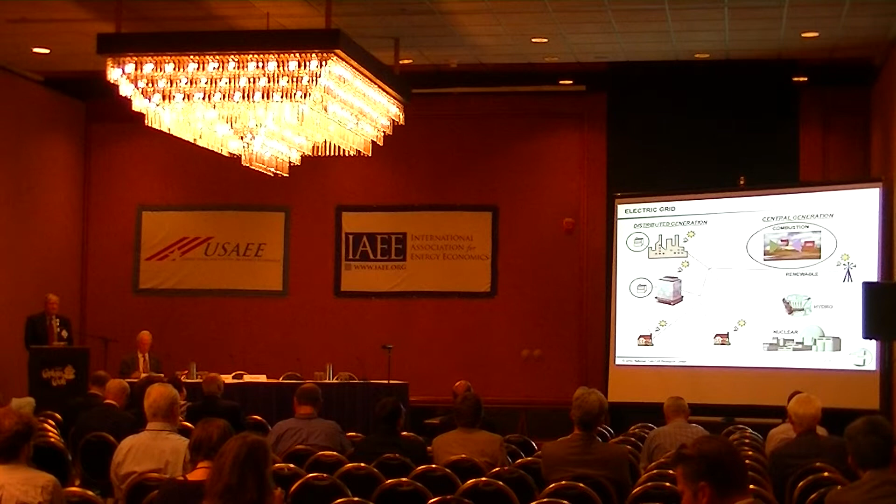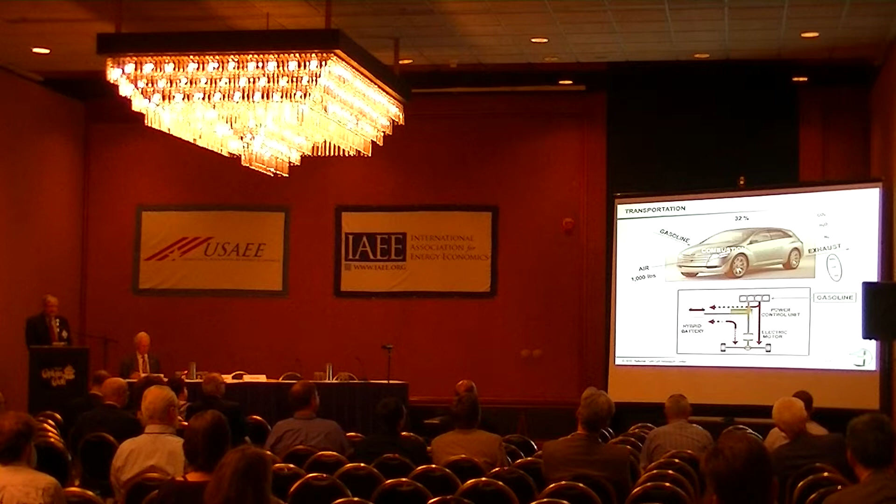Combustion today is responsible for upwards to 80% of total power generation in the world, whether electricity generation or the propulsion of the automobile. It takes fuel and air, processes it through steps that include combustion chemistry, and then mechanical devices such as pistons, turbines, and generators to eventually produce electricity for our electrical needs, like room lights or this new hybrid automobile technology. You can almost intuitively feel there's limited efficiency due to the mechanical systems, and we know that due to the combustion chemistry we have emission of pollutant species, the list we just went through.

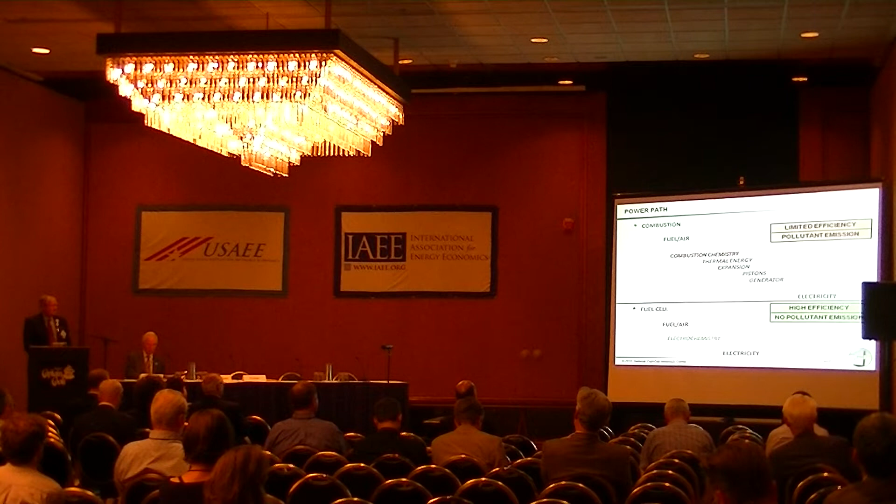As an alternative is the fuel cell, whose attributes include one step from fuel and air to electricity, electrochemistry. This gives rise, intuitively, to a high fuel-to-electrical conversion efficiency, no pollutant emissions since we don't have combustion chemistry but instead electrochemistry, and it's also acoustically benign, which is attractive for many applications.

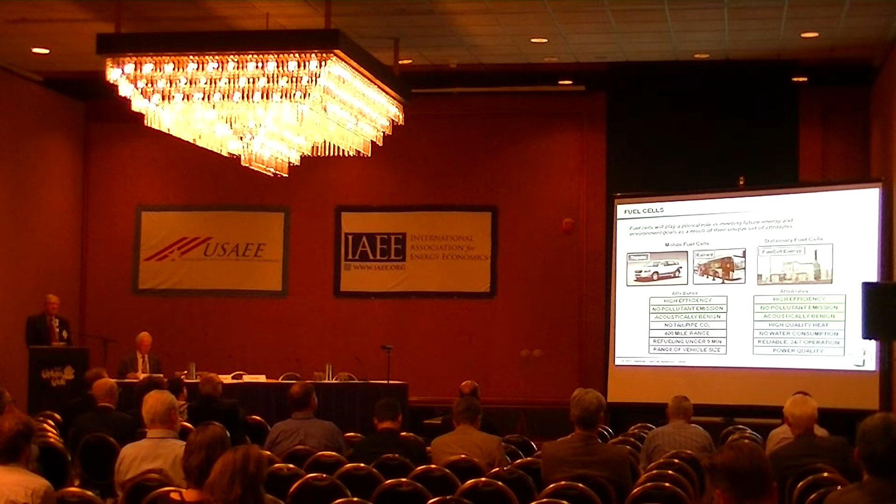This means we're directing more attention to fuel cell technology in mobile fuel cells and stationary fuel cells. We're starting to see that fuel cells will play a pivotal role in the evolution of the grid in the future. We have the attributes we just went through for both mobile and stationary fuel cells, and due to the application, there are additional attributes for each. In mobile fuel cells, there are 4 additional attributes, and for stationary, symmetrically, 4 additional attributes specific to each application.

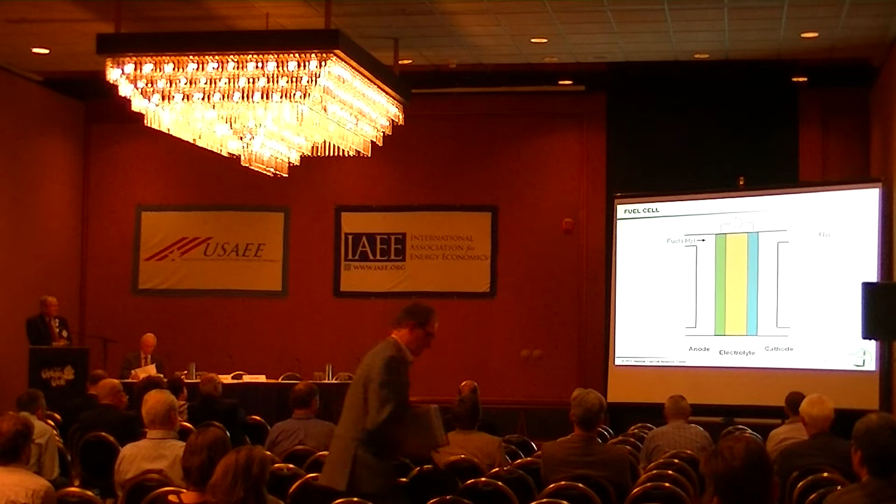I'll go through this in more detail in a moment, but let's look at what a fuel cell combines and encompasses. Here's what it looks like by way of a cartoon, a bit like a battery. Its principal part, the heart of the fuel cell, is the electrolyte. On one side is an electrode we call the anode, and on the other side another electrode we call the cathode. Fuel enters the anode port, and oxygen from air enters the cathode port.

The fuel reacts at the surface of the anode to give up a proton as well as some electrons. The electrolyte allows the proton to go through from left to right, but the electron needs to find another path. That's fortuitous for engineering, because we can take that electron and drive a load, say a light bulb. The electron comes back a bit spent, as you'd expect, to the cathode side, but still has enough energy to reduce the oxygen from the air, producing an oxygen atom that combines with the proton to form water. Out of the exhaust comes the water along with the nitrogen that went in with the air.

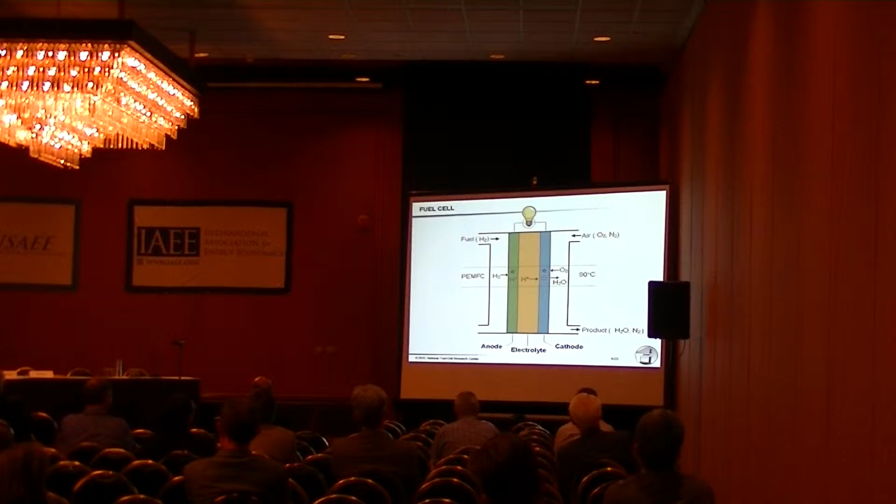This particular kind of fuel cell has a chemistry we just went through, and it's called a proton exchange membrane fuel cell. It also operates at a specific temperature, right around 90 degrees Celsius. There are other types of fuel cells we'll look at in a moment, but this one is particularly attractive for the automobile because it has a reasonable operating temperature, and we can also turn it off and on at will, giving it a very attractive dynamic capability.

If we now look at the application to the automobile, we come back to our gasoline-powered hybrid, and let's initially replace the gasoline with hydrogen. What that does right off the bat is remove any carbon containing species in the products. For example, the carbon dioxide goes away, which is what we want for climate change. And for urban air quality, we'd like to get rid of a few of these pollutants, and hydrogen takes away the carbon monoxide and the hydrocarbons.

So just that step is attractive, as well as providing our goal towards fuel independence for countries around the world. If we take the next step and replace this reciprocating combustion engine with a fuel cell under the hood, we now have the fuel cell hybrid vehicle. I want you to recognize this is the way vehicles are evolving - as hybrid, battery electric vehicles, but with longer range. This increases efficiency by a substantial amount, nearly doubling it. It reduces the amount of air we must process and the oxygen we take from the atmosphere, and it removes the remaining pollutant species we're looking to preclude for improvement of urban air quality.

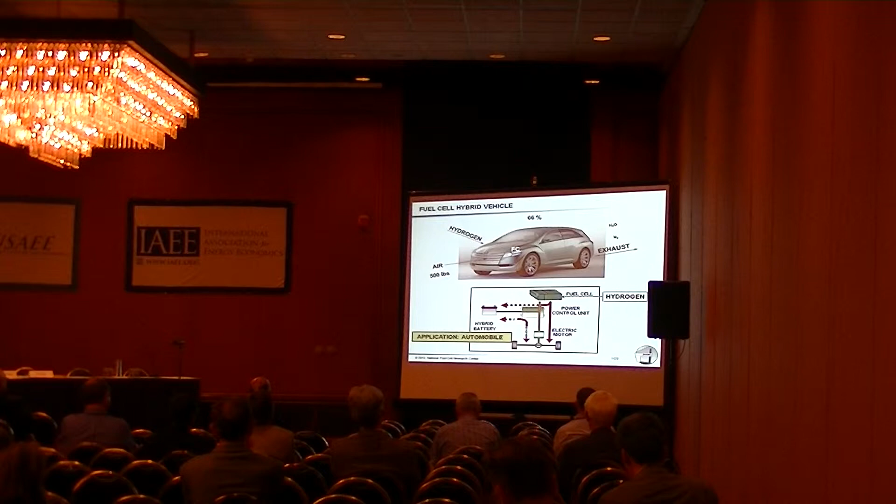So that in a nutshell is the fuel cell vehicle. You can imagine that under the hood we have something that looks like this, an engine, not a reciprocating engine, but a fuel cell engine with hydrogen as the fuel, producing along with air, direct current to drive the motor, and then the exhaust we now know is made up of water and nitrogen.

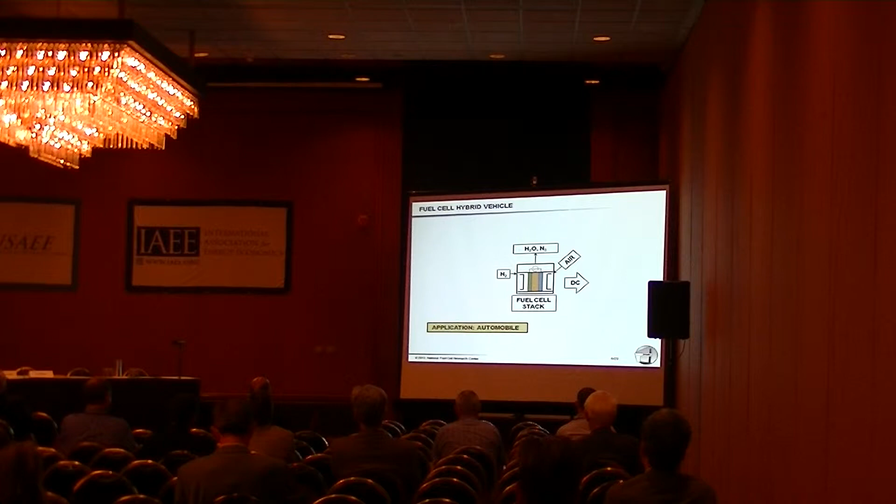What this is looking like are three examples you see here, a product from General Motors, Toyota, and Honda, all of which have been undergoing road testing for up to a decade, depending upon the vehicle.

We want to identify those three attributes we talked about earlier, and remember I said that it adds another four depending on the application. In this case, for mobile fuel cells, we have the additional attribute of no tailpipe emission of carbon dioxide, a 400-mile range, which is equivalent to what we expect today as the public, refueling under 5 minutes, again, something that we're used to and want to retain.

And then we're seeing this coming out in a range of fuel cell sizes. As far as mobile applications, it's not only automobiles, but also buses. And we're starting to see now more and more fuel cell buses being deployed around the world.

And then other applications we call specialty vehicles. This is a forklift truck where batteries are being replaced by fuel cells in order to provide much faster charging time and also longer use per charge.

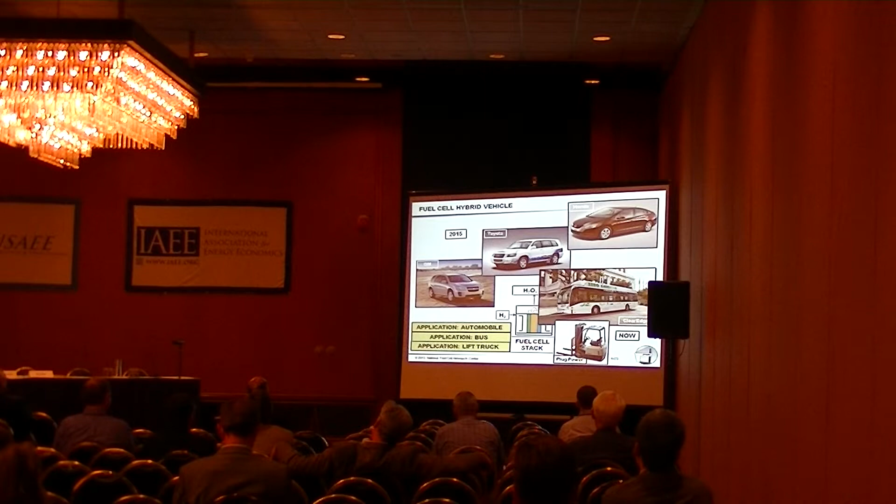On a commercialization basis, this is actually commercialized today. It's a very popular application for distribution centers, for commercial applications, and for the government. On the automobiles, we're looking to 2015, just 2 years from now, for the retailing of automobiles in select markets throughout the world.

Well, this is the list of the attributes. We've just talked about hydrogen powered. Let's go to natural gas powered to give you a feel of that application.

And here we're really talking not about a mobile application, but a stationary application. And for that, we need to derive our hydrogen from a practical source. That practical source is typically natural gas, which through a reformation process provides the hydrogen.

On the electrical output side, we are not quite accustomed to using DC today, though I think we will be more in the future. So we go through an inverter or power conditioner to produce AC. And this basically then is the fuel cell for the stationary application.

Here are those basic 3 attributes that we introduced at the beginning, and the additional 4 for this application include high quality heat, because in a distributed generation application, we wish to operate this, if possible, as a combined cooling, heat, and power. No water consumption, one of our major goals in the future of producing electricity.

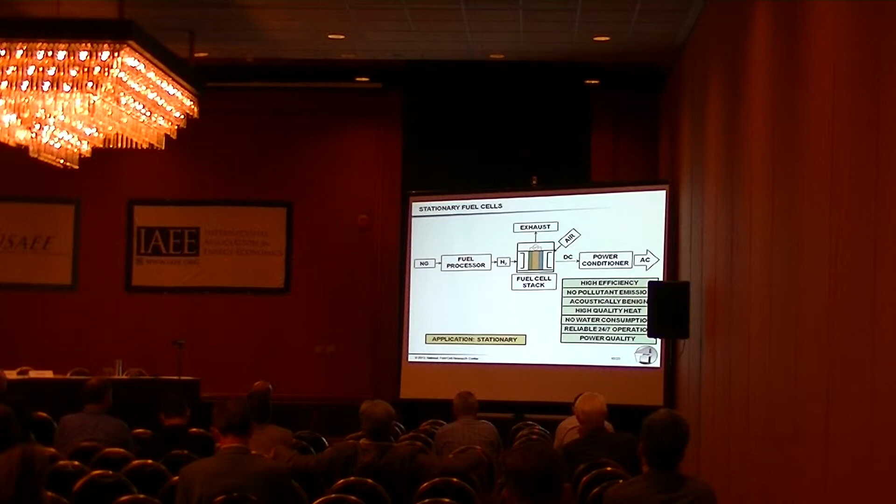Reliable 24/7 operation, baseload operation. And then a means of maintaining and controlling power quality, which is becoming much more important to the consumer.

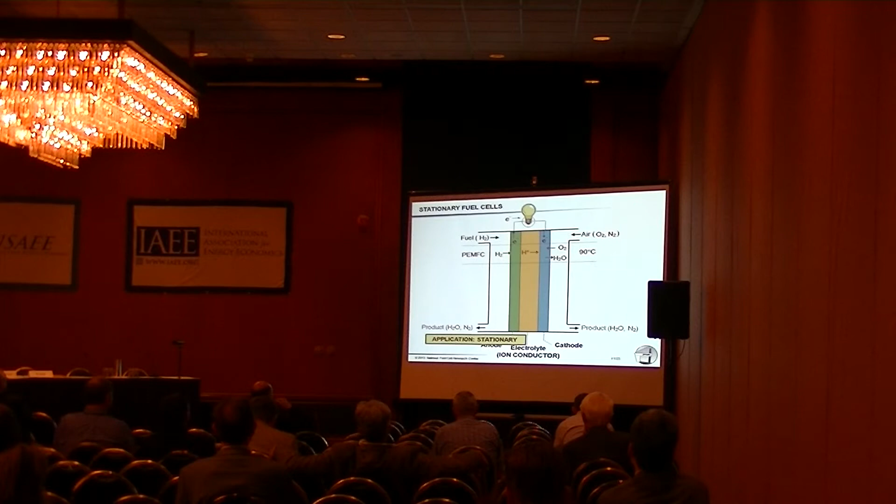Well, here's our diagram again of the fuel cell, and you see the proton exchange membrane fuel cell. I promised you other fuel cell types, and here they are. Phosphoric acid, fuel cell number 2, molten carbonate, fuel cell number 3, and then the solid oxide fuel cell number 4. And you can see that the chemistry is in some cases similar to the proton exchange membrane, and in other cases quite different. And it's that electrolyte here and the attendant chemistry that causes a variation in these fuel cell types. We call them types.

And if you look over here, you can see that the temperature varies substantially from the relatively modest temperature of the automobile proton exchange membrane fuel cell to upwards to 1,000 degrees Celsius for the solid oxide, another distinguishing factor of these fuel cell types.

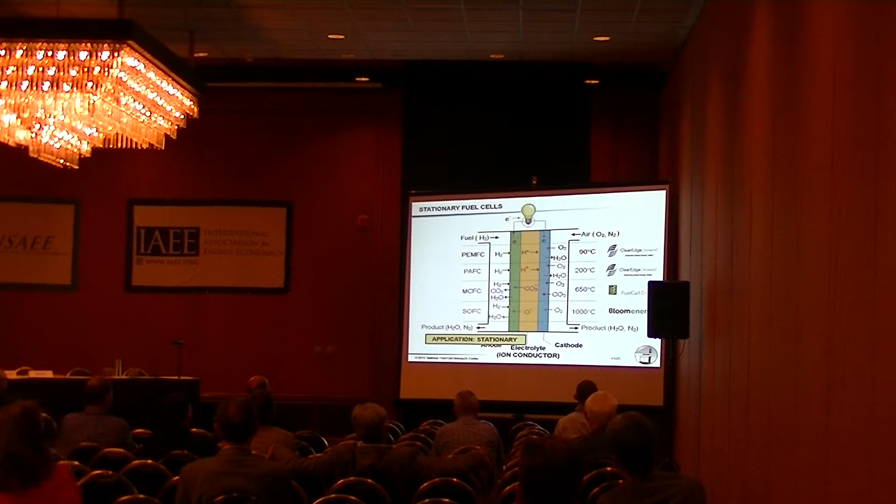And intuitively, you can start to feel that these up here, once you turn them on, you don't want to turn them off. And you're right, these want to be base loaded, so they would not be applicable to an automobile, for example. Here are the manufacturers for these with respect to the major manufacturers today in the world deploying these systems commercially: ClearEdge Power, FuelCell Energy, and Bloom Energy.

If we look at the deployment in the commercial market, I take California as an example, you can see up in the right the table that shows a very attractive distribution of applications, and from an economic point of view, you would agree that this is attractive in order to get traction for a product, to have a variety of market segments engaged and have a variety of risk values engaged.

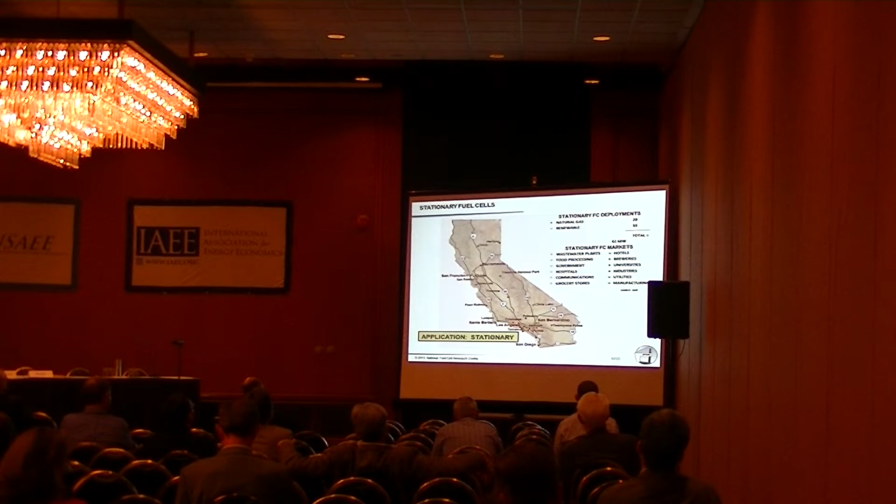Up here you can see about 61 megawatts deployed in California. That's actually more like 80 megawatts today, and the red dots in the map represent locations where these facilities have been located. Here you have a risk-adverse hospital, a St. Helena in Northern California.

That's a 400 kilowatt phosphoric acid fuel cell recently deployed. Here you have a grocery store in San Diego, another 400 kilowatt phosphoric acid fuel cell.

In the outage that went from Arizona through Southern California in September 2011, this fuel cell had just been installed. It went into an islanding mode during that outage, retained services for the community of food and other supplies, and precluded the disposal of all the perishables in the store, which would have had to occur after 4 hours of the outage. In Hurricane Sandy, 23 of these units, all of the units in the footprint of Sandy, remained in operation, islanded, and provided those services to the community.

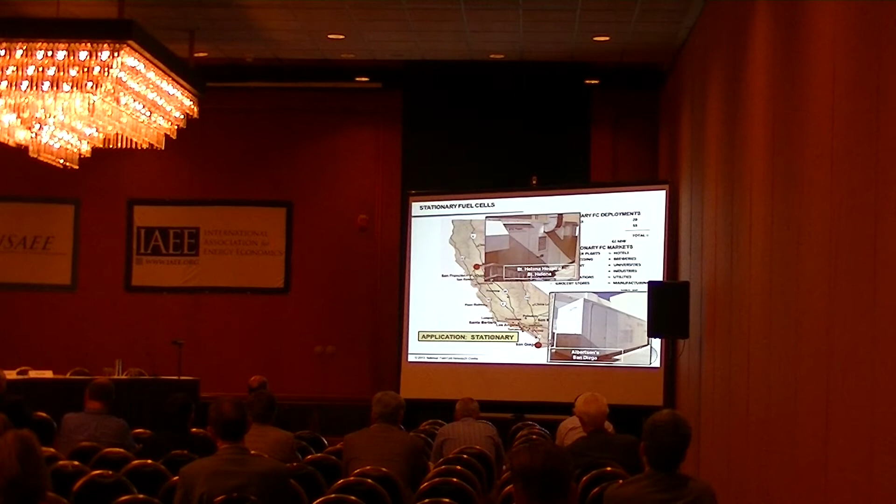And this has caused a major uplift of attention in Congress with respect to the utility of these systems, as well as to microgrid technology.

Another application is another risk-averse application at Northridge campus of Cal State University. This is a 1 megawatt deployment of molten carbonate fuel cell product with waste heat recovery, as we've seen already.

This is an application in Ontario, California, a relatively interesting one and relatively new. It's 2.8 megawatts, and it's operating on biogas, so it's actually producing renewable heat and renewable electricity. Today, it's the largest biogas powered deployment in the world.

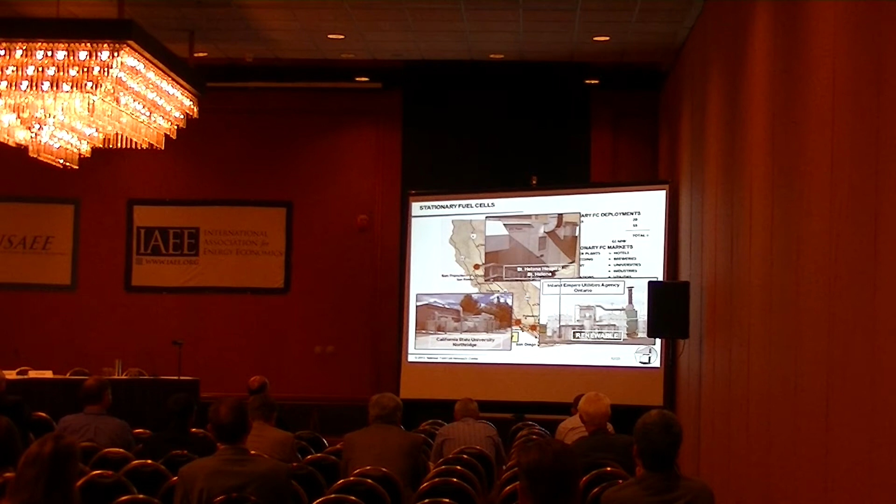Now, between natural gas and biogas, we have a pretty even split of operation in the state of California. So this is a very popular application.

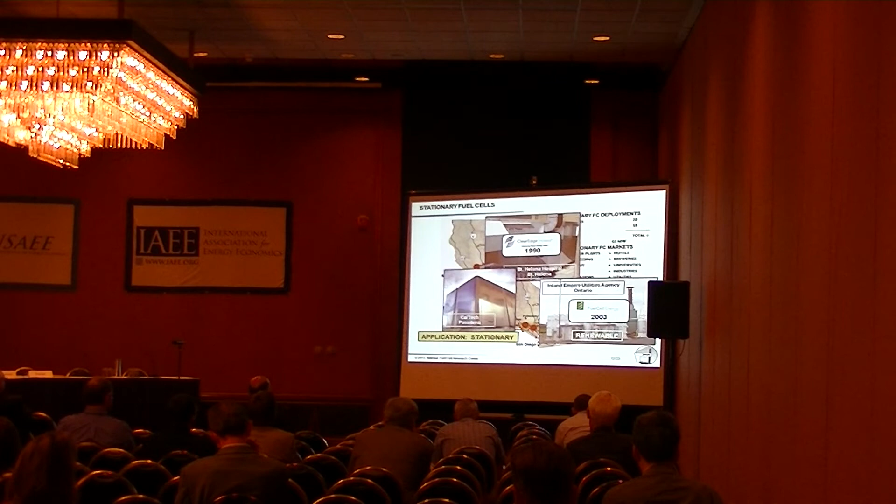Another example is a 2 megawatt solid oxide deployment at Caltech, California Institute of Technology. If you take these combined: this is Clear Edge Power, which began commercialization in 1990 with the phosphoric acid fuel cell. This is Fuel Cell Energy with the molten carbonate, began commercialization in 2003. And this is Bloom Energy, which began commercialization in 2009 with the solid oxide fuel cell.

Coming back to our map of the grid, we're seeing deployments here in distributed generation at industries, at hotels, hospitals, universities, at the wastewater treatment plant with renewable operation. Those are the commercial products that are now being deployed in California and other locations in the world.

We also are starting to see a commercialization of fuel cells in residential applications. That's very new. And we think in the future that we'll see fuel cells deployed on the utility side of the meter in order to provide grid support at the pinch points between transmission and distribution legs of the utility.

We have a special name for this. We call them Tiger stations, for Transmission Integrated Grid Energy Resource.

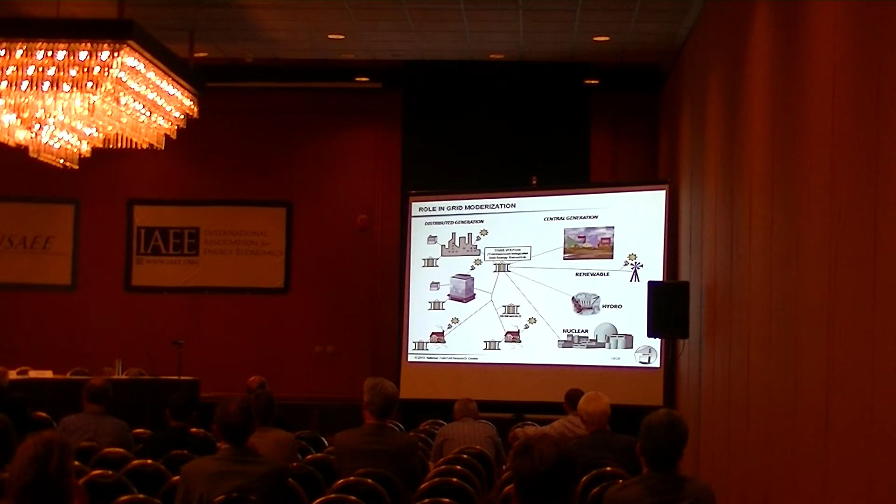Up until recently, it's been a figment of our imagination that this might occur someday. But here's some evidence of it occurring. This is in Korea, which has become very, very proactive in the deployment of fuel cells.

Over 10 years, we have 80 megawatts deployed in California. Over 4 years, over 200 megawatts deployed in Korea due to policy that encourages this kind of technology. This is the largest fuel cell power plant in the world at 11.2 megawatts.

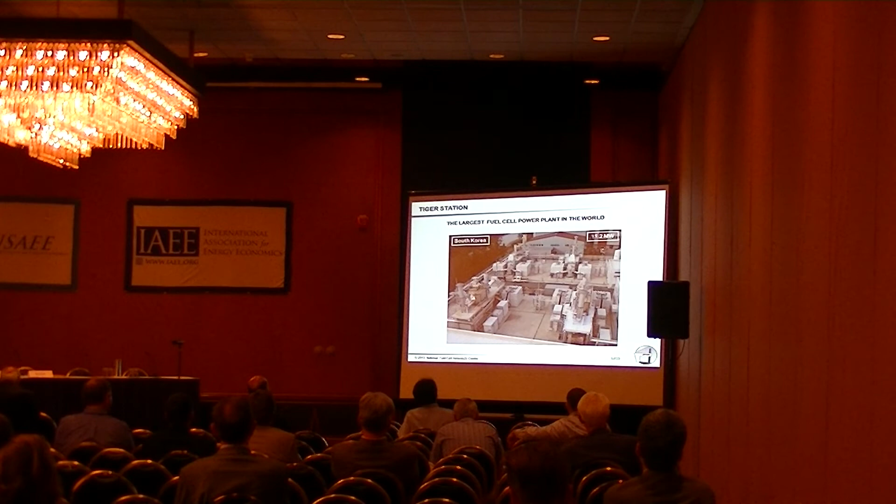But we're on the cusp of soon having the largest fuel cell power plant in the world in the United States, in Bridgeport, Connecticut. You can see it's under construction at 15 megawatts.

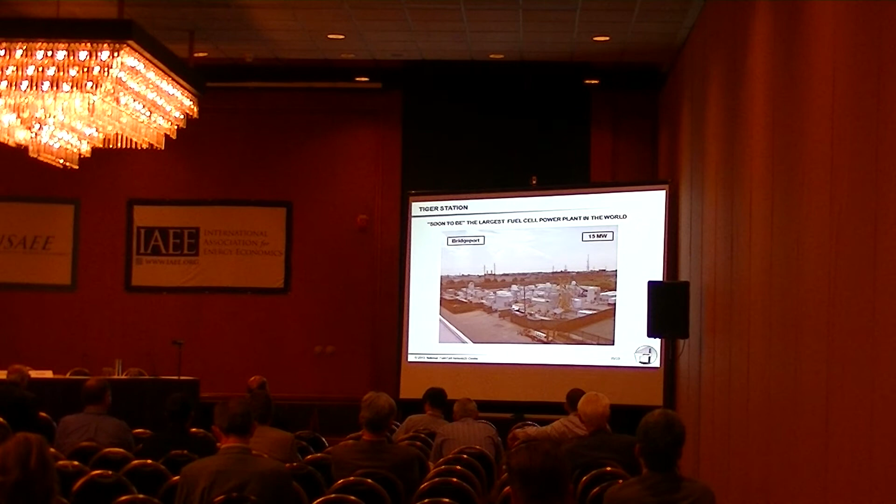And then we'll have the largest fuel cell deployment in the world, a 59 megawatt deployment now in construction in Korea. All examples of this Tiger concept on the utility side of the meter.

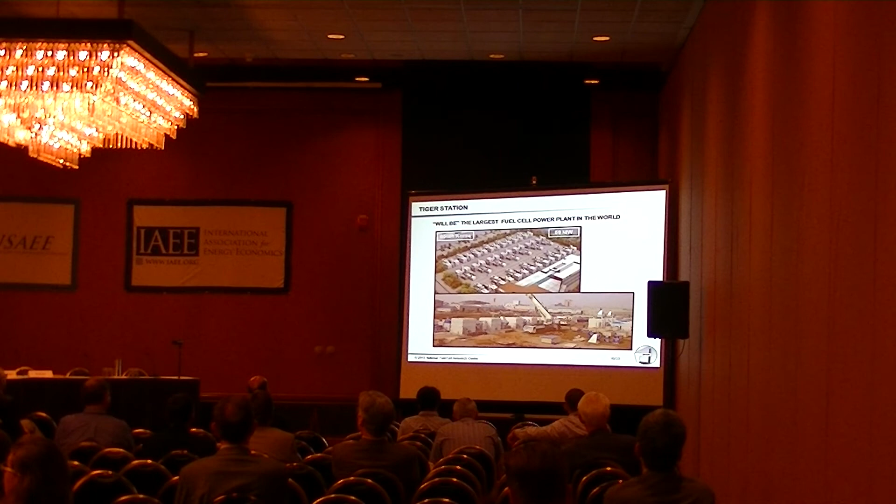Well, it looks like we haven't gotten very far down our list, but we actually have. We've talked about 24/7 baseload, virtually zero emission of criteria pollutants, and we've talked a little bit about the biogas operation. I want to give you a bit more on that.

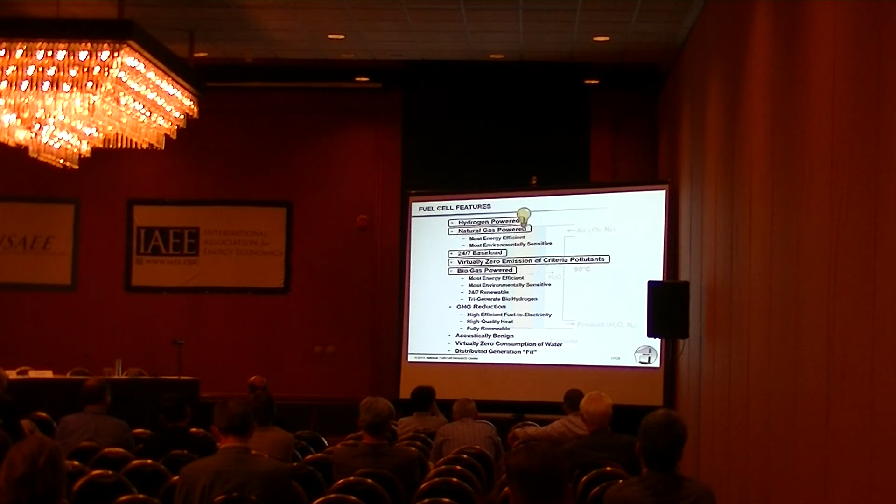Let's just look at a wastewater treatment plant and use this as example number one. This is the manner by which our sewage and garbage disposal products are processed with different types of processes here, but primarily a digester that creates a biogas but needs heat.

And the heat is typically provided by a boiler operated on the biogas, but also on natural gas to complement that. And then we have electricity coming in from the grid to support this overall operation.

A very exciting and expanding market in the world is the use of a fuel cell in this application to replace the boiler, whereas now the heat from the fuel cell for free can provide the heat to the digester, and then in addition you're getting AC power to support the plant itself.

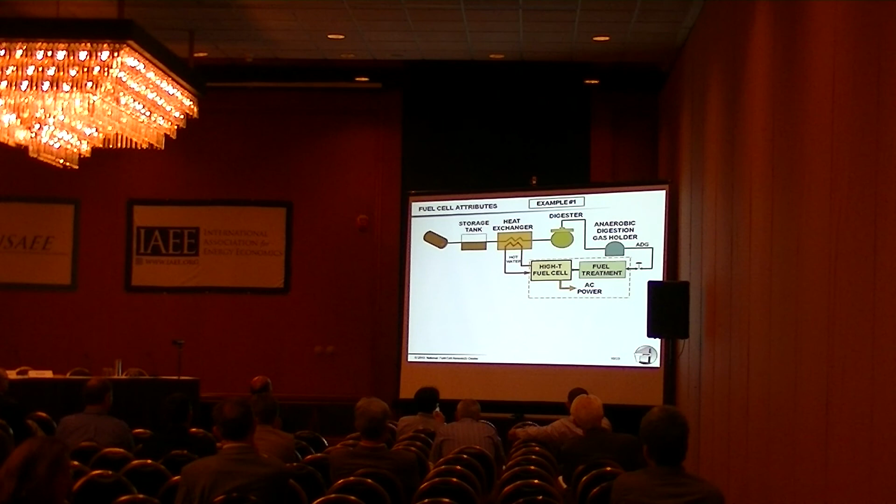And we showed you a moment ago this example of this 2.8 megawatt system in Ontario. So this is example number one.

Example number two is fascinating to me. This is a privately owned onion operation, the largest in the United States, in Oxnard, California, where the family...